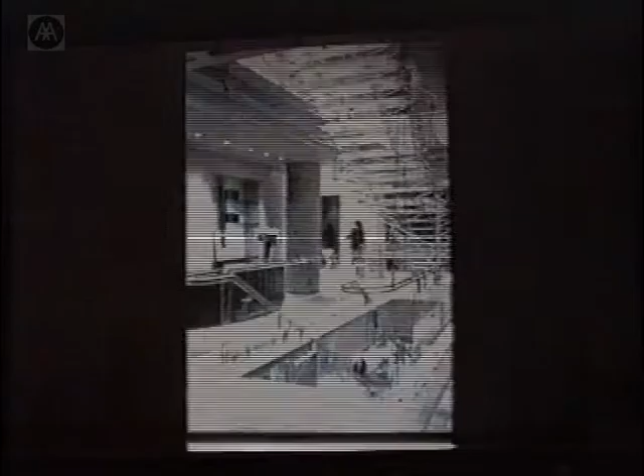This is Eva Jiricna's staircase in Sloane Street, now gone, and I believe rebuilt somewhere in Sweden or Denmark. This was quite a different solution, not engineered in the first place. A contractor in Los Angeles, while she was doing this staircase, used glass treads in aluminium trays, but they kept cracking. The contractor suggested putting acrylic between the aluminium tray and the glass to soften any hard edges. She finally thought, why have the aluminium tray at all? Why not just use the acrylic? It's quite a subtle result, because you couldn't use acrylic on its own—it scratches very badly and is terribly flexible, so it would need to be very thick as a material.

The glass is ordinary annealed glass, not toughened or laminated, just a sheet of ordinary annealed glass. The whole way this works is that if the glass cracks, the acrylic tread underneath simply holds the glass until you come along and replace it. This was installed in 1990, so it's been there about 8 years. I heard of only one cracked tread during that period, so it's quite interesting that it can be robust, serviceable, and obviously very elegant.

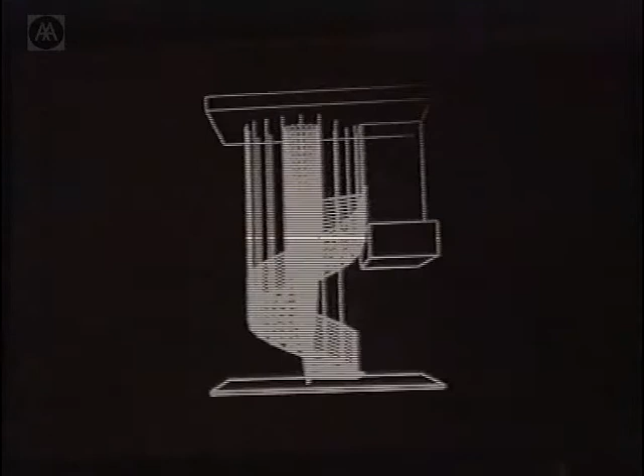This is a third method of forming staircase treads, the first project we did with Jamie. It's a very simple, very effective use of glass, and I think the most elegant part of this is the central core, which was made by a wonderful guy called Tim Eliassen and his company TriPyramid in Boston.

He actually knitted that basket together from, I think, 4 or 5 mil wire. Luke, who's here and worked on it, could confirm—4 mil wire? 3 mil even, right. They were welded together, came in 2 halves, and were welded together on site. It was quite an exercise.

But I'm talking principally about glass tonight, and this is the makeup of the tread. We didn't even really look at this in truth—Jamie just specified it. You can see it's 3 pieces of laminated glass, laminated with a very fine laminating material, with a sandblast on the top. That's the support condition underneath, with 2 little spars onto the basket.

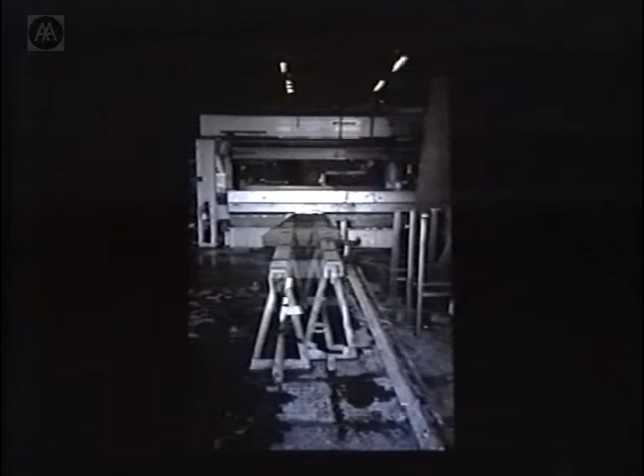So we had to make sure that didn't happen. We went through a lot of pain and torture. And the other thing about Japanese industry, particularly Asahi, is they were amazingly efficient and clean. They had white coats on in their factories, and they were all smiling. It was wonderful - they did everything in unison.

And of course, the odd thing was that they couldn't make these glass blades for this structure - funnily enough, because they didn't have a machine to toughen the blade, and they didn't know how to toughen it. Our man John from the East End, he had a machine that could toughen this blade, and he knew how to toughen it.

But the worry was that Asahi were fronting this job, and Asahi had to take ultimate responsibility. And I didn't want them to meet John - not that there's anything wrong with John. John is the best of the best, but he doesn't wear a white suit, and all his workers don't smile all the time. In fact, he works bloody hard, and he's got debris all around him because he's thinking about the thing in hand rather than what it looks like.

And it's not very big as a place - it's getting bigger now in the last couple of years, but at that point, we finally waited till this was made and lying on the table just like that, till we finally took the Asahi guys down there. And of course, when they looked at it...

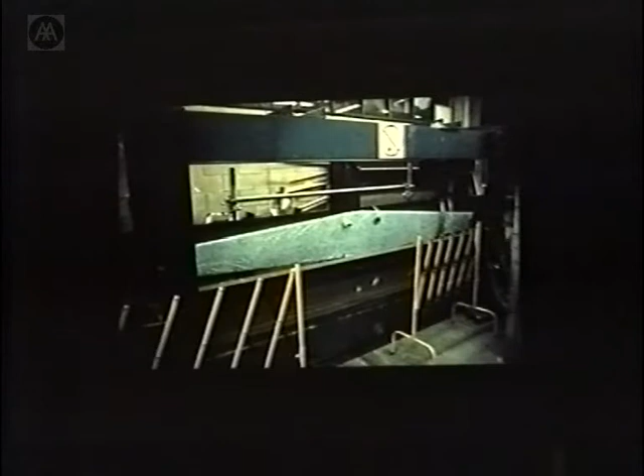So we took it, and they gave us a whack of money - £50,000 - and said go and do some testing. So we said, right, let's go do some testing.

So this is it in the laboratory at City University in London. The first go around, when they were cranking this thing up with a load on it, the bolt broke - much to the chagrin of the lab assistant, who in 72 years of his life had never seen such a thing. He was like a born-again person, you know, he got all these textbooks out. He said, 'Wow,' he thought this was a joke, breaking glass.

But the theoretical breaking load of this broke probably at about 9 or 10 tons, but theoretically, if you can get that hole right in the middle, it's about 19 tons. It's quite good, isn't it? It's quite heavy.

That's how it breaks - you can see it goes into lots of really small pieces because it's very highly stressed. That point, that's the boom - it's the failure there. It's wonderful when it goes. Everyone's nerves go, 'oh, bang.'

I can't stand it, to be quite honest. Every time I go to glass testing, I can't stand it.

Anyway, we went through these amazing hurdles to finally get it on site and built. And this is the jet. See what I mean? See how beautiful they're all exactly the same?

And the other funny thing was that having gone through all this testing and proved we had factors of safety of 12, there was someone from the contractor who was actually an architect, Suzuki-san. Suzuki-san, all the way through, never said a word. He was the only one who never smiled, you know.

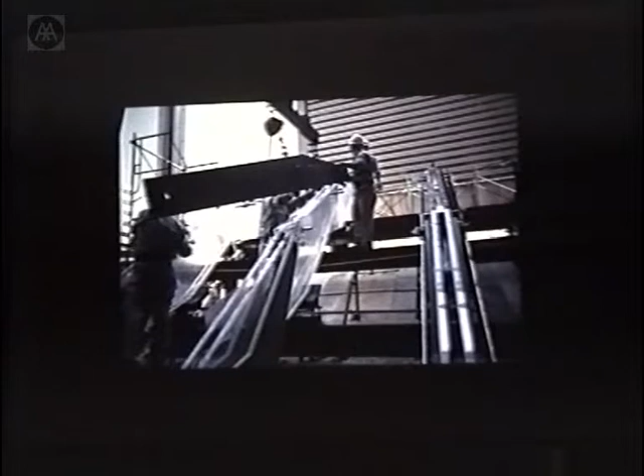There they are, in the core of the thing. They do absolutely nothing at all, right? They've got enormous tolerance here because their temperature movement is like that. And it would only be if the whole thing completely collapsed that they might at the end actually stop it touching the ground, because they deflect about 5 feet.

So they're in there like a talisman, and the only way we could get it built was to do that. And that's how it ended up, as a complete glass structure.

And we really had the time of our life. And we had the time of our life because we got hands-on at every level. And that was the real joy. And hands-on, being an engineer and not knowing where you're going, that was a real joy, because every day is a discovery.

Sometimes a shock. But inevitably, you see these acrylic things up there? They're all right, actually. I think they look fine proportionally, maybe it was an architectural sense. Maybe he architecturally didn't like it, and he wanted them a bit fatter. That was an excuse.

Funny reflections. And there's a little detail at the top that holds the roof panels on, just a little metal fitting in the middle. You see, you transfer the load from one to the other, so you get lots of purchase across that distance there. It keeps the load in the bolt down. That's why it looks like that.

Anyway, I better hurry up. This is the glass cube in Saudi Arabia that we just finished. Interesting thing about this is friction grip fins, which are laminated, not single sheets, which is normal, and in two directions, so the thing works as a two-way structure everywhere, and it's got lots of fail-safe in it.

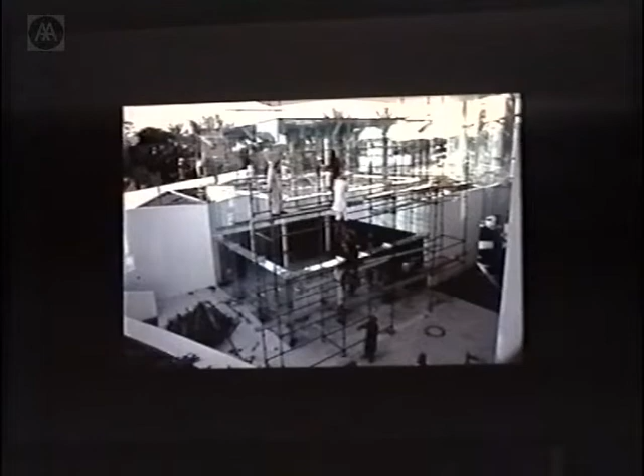It's nice, it's a local firm, and they built the cube. That's the other thing in the glass industry: often the big boys say, well, we're the only guys who can do it. But if you get hands-on and you really get down to it, you can do a lot. And that's it, put together. You can see the two-way plates there, and we've even got little diagonal plates in the corners there.

And it's even got doors in it, which is kind of nice. And we told our engineer not to come back till he'd walked on the roof. He did come back, he's back, that's him. Anyway, the idea is that they're laminated. If one breaks, you still have another one. Even if the whole beam went, the laminate material would keep it there because of the bolts on the laminate material, and the beam would span the other way. So it's all good. That was from the small.

This was supposed to be also the small to the conspicuous, in the sense that starting from a small idea, where does it eventually go? And we got through the Tokyo Canopy experience a chance to do this facade here, this bottom part here, which basically has horizontal beams spanning 11 meters between the column positions, which are there, and carrying the insulated glass panels in between. And these horizontal beams are actually external.

There you can see, that's during construction. And again, this was built by a local glass company. Pilkington and Asahi said it couldn't be done. And the glass company director took me out one night for lots and lots of drinks, as they do in Korea, at the end of which he said, if this doesn't work, and then he didn't finish the sentence, but I could imagine.

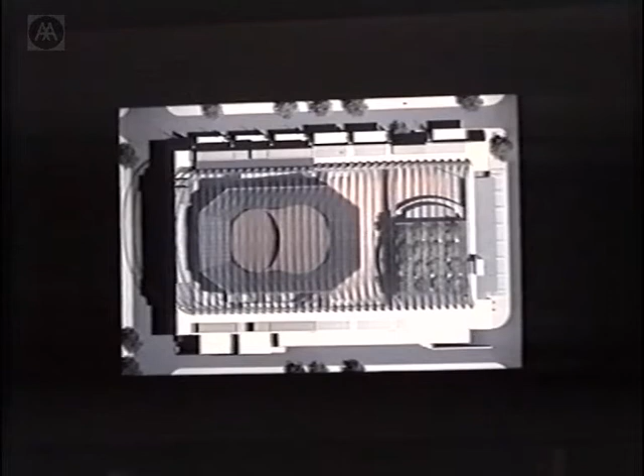There's the folds which give it its stiffness. Well, it's a barrel, obviously, because it's a big barrel. But just to go back a shot, the interesting aspect is also that it's a Vierendeel beam, and a Vierendeel beam just means that these elements, instead of being diagonals like you normally get in trusses, are vertical and are therefore in line with the glass, which can be normally cut as rectangular panels and put together, and it's fairly big. That's a big 2,500 seat concert hall.

And we're also doing the end wall in this in something that, when I was round Jamie's office one time, he showed me this model of something they were doing in Germany, and I said, "What's that?" And he said, "It's something we're doing with Jörg Schlaich." And it was a cable, which he undoubtedly will show you. Anyway, we kind of thought that was amazing to do such a thing.

So we've actually done something using those principles on the end wall here, where we've got cables at about 4-foot centres, but instead of having horizontal cables, what we're doing is weighting these cables in one direction only, and we've got cast iron weights on the bottom of the cables. We've got a whole row of cast iron weights along the bottom there, and when the wind blows, the wall moves quite a lot, but that's about 180 feet, which is about 60 metres or something across there. So the big weights are just in there, and they're just in one direction.

Our mock-up is in about a week's time, and we're going to get down and see what happens. But again, it's moving the Americans. The Americans don't normally do this kind of thing at this level contractually. They all get a bit worried about it. But we've got a local glass company doing this, National Glass. They're rather amazed at doing it, but they are. And anyway, that's my story so far.

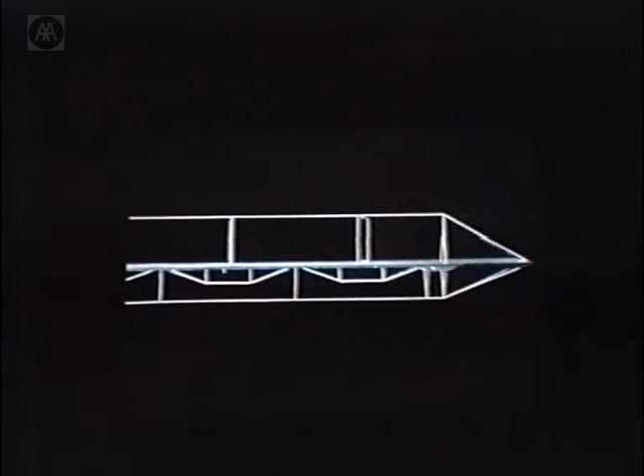And the glass planking was designed in such a way that, I'm not sure I can focus here, but the goal here was to not only use this glass platform as this very extraordinary glass form floating in space above the river, but to take sunlight and use the activation of light to let the light come down, strike the surface of the river, and then reflect back up.

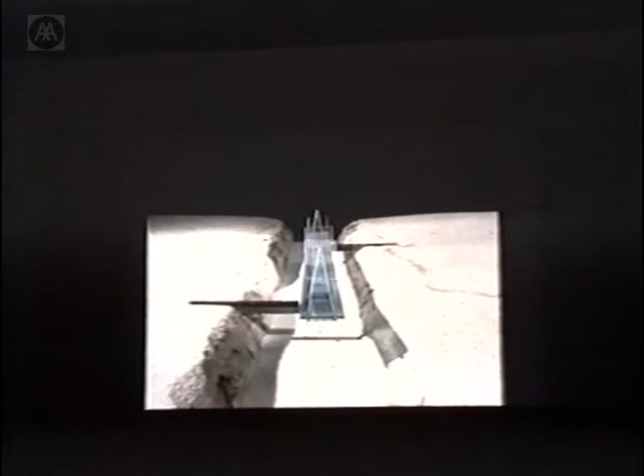So this glass platform basically is the surface of the river, sort of extracted upwards, and it becomes the surface upon which you pass over the river itself. And I think that just very simple notions of that, engaging our movement through a space, both in urban context, or in this case very much a rural context, but using these structures as a way to open up your sense of how you relate to your surroundings is a very, very critical element of all the work that we do in the studio.

And by taking one of these very simple principles, this is the same principle as on the bridge deck of post-tensioning glass, and this is a project done with Tony Broomhead, who's here. This is basically a wall. It's a glass wall done for a project by Richard Meier, and this wall basically separates a private art collection from a private residence.

And it's designed with a counterweighted system so that the glass wall basically descends down into the basement of the building, and then when they want to separate these two spaces, the wall is deployed and comes up into the space. And it was a study really of two things.

One being, how does one basically take a stack of glass, and I'm talking literally of a stack of glass, stacking glass plates edge to edge, two stacks with a stainless steel rod running down the middle, and putting enough compressive load on those glass plates that that's all the structure you need. You're putting so much tension into the system that the glass basically has no other restraint except for the compressive load.

And simultaneously, by taking these two surfaces, playing with the phenomenology of both surfaces, the one wall facing the collection area has a very highly reflective surface to it. It's still transparent, but it's a heightened level of reflectivity, slightly higher than a clear piece of glass. And then the reverse surface is totally diffuse.

And to do projects like this, and this is, I think, where Tim's speaking in advance of my own speaking is very appropriate, because I think we follow very similar avenues here from the point of view of wanting to work with a material that none of us really understand in all of its potential strengths and weaknesses, and therefore all of these projects demand empirical testing before you can move forward with them.

And in this case, you're seeing the two stacks of glass, one series at the front, one series at the back, stainless steel rod running through the middle, and putting a significant load into these pieces of glass and then trying to break them. We couldn't break it utilizing any of the normal testing procedures, which is swinging 300-pound weights into the glass itself.

And then we needed to essentially just break the glass, which we did with a sledgehammer, to find out what would happen, because you would imagine by stacking these glass pieces edge to edge, putting such a serious load on them, if you were to lose one panel, that the whole system would be a progressive failure.

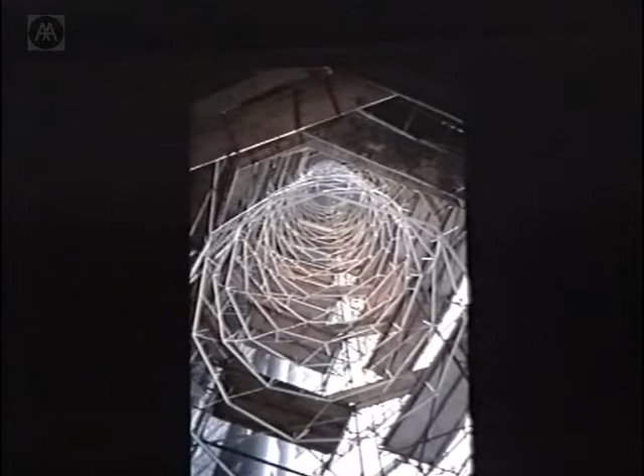So it's this exploration of, as I said at the very beginning, in this case, focusing on a very, very specific task of compressive loading of glass. How can this be developed? How can this then lead to larger projects? And using these small-scale projects as explorations in that sense, but simultaneously overlaying them with this goal of playing with reflectivity.

And then taking this to another level, using glass as a compressive material, and this again was with Tony, who's here, is this project, which is in Hong Kong, and this is one of the projects next door here in the gallery. And what we tried to do in the gallery exhibition was not necessarily just show drawings, but try to have you participate in some of the installation sequences by using those photographs and slides. And we actually do the installation work. We actually oversee fabrication, and we do the installation work.

And I think it's critical to understanding what happens with these structures when they're being built, to then be able to take them to the next level afterwards, to be there and to really understand what's going on with them. But what you're seeing here is this pair of helical nets woven that create the tensile net that will ultimately hold all the glass pieces in position, sort of the scaffolding that goes up around this piece.

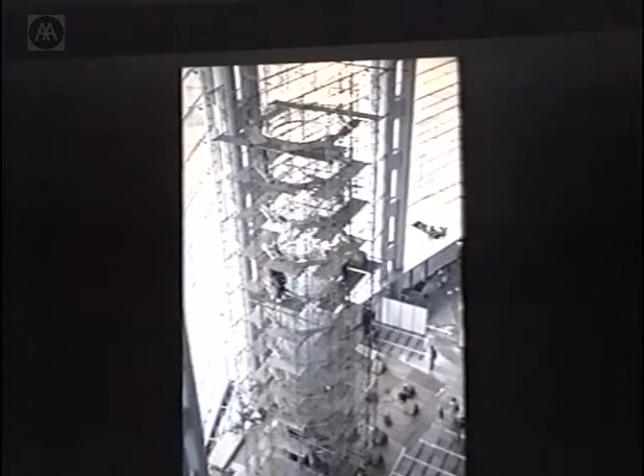The nets are hung from this ring. There's one helical series of nets in one direction, then an opposing helical net in the opposite direction. They're all woven together and then preloaded at the bottom. A very, very significant amount of weight added to the bottom through water basically stretches those cable nets. Then all the glass is put into the woven cable nets. And here it is all coming up, the last pieces of glass going in.

These are the cables. They're about 3 millimeter diameter cables. The last pieces of glass go in, and as you're progressively building the piece, you're slightly removing preload, so the whole piece goes into compression once all that preload is removed.

And a comment that Tim had made, I think, is very critical to doing structures like this, and that's the ability of the machinery today in the glass industry to actually manufacture parts with essentially zero tolerance. In this case, this is about a 25-meter high structure. Tony had completely calculated out all of the different conditions of this piece under its preloading, and then its loading with the glass. And you're able to build something like this over that length to 1 millimeter in dimensional tolerance. And part of that's due to the fact that the glass is being cut with these water jets and other equipment that allows for that to take place.

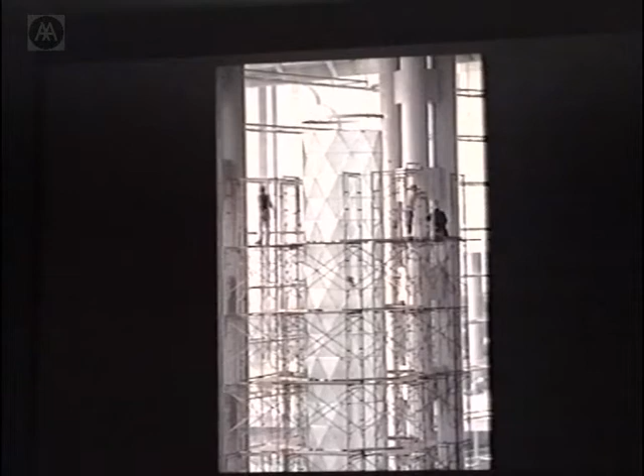So anyway, here it is. It's just working with a shell. It's basically a glass shell structure. And the obvious next step is you can build a complete structure. It doesn't have to be a piece of sculpture. It can actually become a room, a building, whatever it might be. But you can actually use the glass bearing on its adjacent panel of glass in compression to build much, much larger structures.

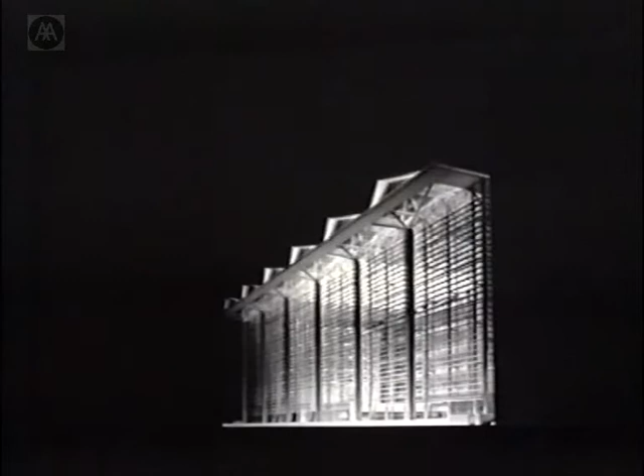Other projects, I mean, the project that is shown next door is this one, which is in the Phoenix courthouse, and is done with Richard Meier again. And it's an interesting project in the courtroom. This is a very, very large public atrium space. This is an immense volume here in Phoenix, Arizona. Obviously, very, very extreme climate. It's all naturally ventilated, using misting systems to provide cooling in the summer, and then just natural ventilation in winter.

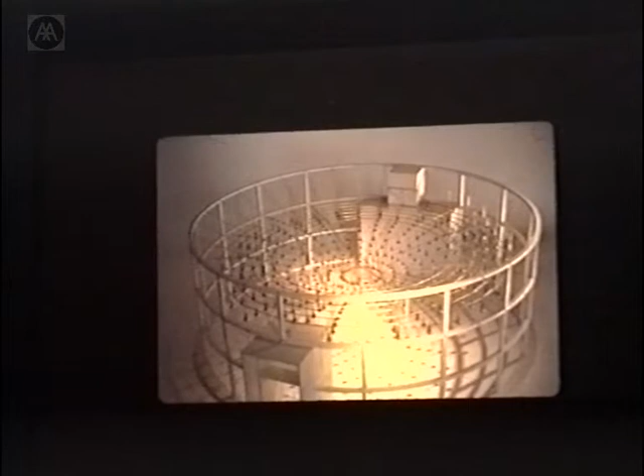And in this drum, which is this courtroom, which will be used for major cases and naturalization processing, we were asked to then design the ceiling or roof for that courtroom, and here's the building under construction. That drum is inside, and the drum measures a little over 100 feet in diameter, and again, it's a cable structure, and this is shown in the other room, and this is a working model of this drum.

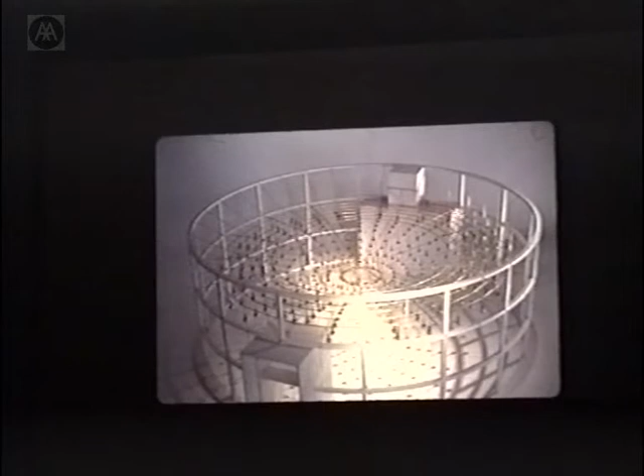And what we've tried to do here is there's two different components to the glass. The outer circumference, sort of this flat roof circumferential area on the side, is totally clear glass. So standing in this floor area of this courtroom, you can look up through this outer circumferential area and look up to the sky above. And then the inner section here is actually a concaved spherical section, and it's made out of a diffuse glass. So it's essentially a fragment of a sphere floating in this clear ring, almost as if it's a bubble floating on the surface of the water.

And that lens really is truly used as a lens. All of the lighting for the courtroom is at the very top of the drum, which is significantly higher than this model. And the lighting is directed down to this lens. That glass refracts the light, and then the light is reprojected down to the different judges' chambers and the jury benches and all of that below it.

But what is interesting about this structurally, I think, is not only its cable net system, and this is a model that is used to anticipate the loading of this type of a structure. When you build the cable net and then begin adding weight to it, the weight being the glass, the whole distortion and the ability to sort of predict how the thing will behave during installation is critical. So this model was really designed to try to get an understanding of how it would behave when you begin to load it.

But what was of interest in this, in terms of the structure, is that we've actually taken the fire life safety system, which is the sprinkler system for the space, and we're actually manufacturing the stainless steel sprinkler systems, and they're being put into tension. The whole fire safety system is put into tension and is used as part of the structure of the whole ceiling of the building itself. And it's only in these cases where if you were to take on a project and build it, you could really do something like that.

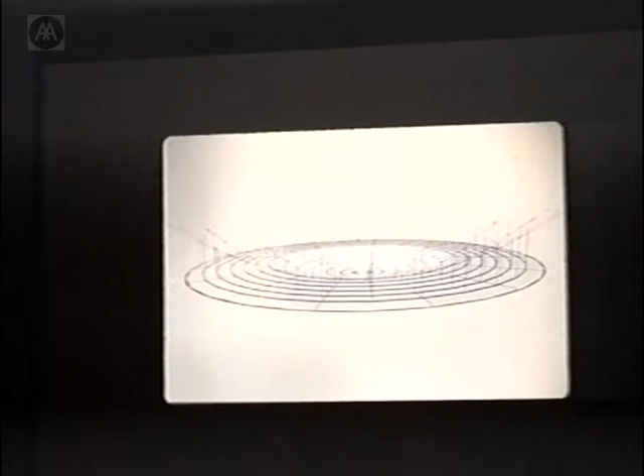And these are computer views of that lens. This is just starting construction in about the next 3 weeks. These are the sprinkler systems around it, and that disc, the clear perimeter section, and then the central lens piece beyond it, and sort of what you would see from the interior.

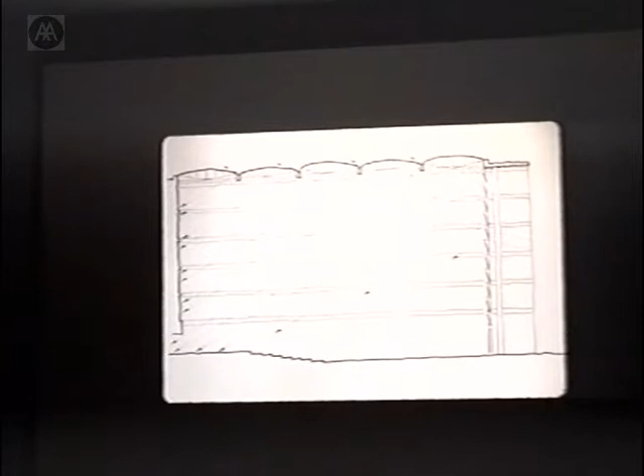But I wanted to just talk about the use of light. I haven't really spoken about that in any serious way yet, but something that intrigues us in the studio is the fact that glass hasn't really been explored very much, I think, really due to the fact that its presence is often denied. Typically we deny the presence of glass as a material in a building. It's thought of in a very abstract way as a boundary condition between interior and exterior, but it's never really represented as something in and of itself, and only in few instances, in some of Mies's work, where the simplicity of the structure and the surface reflectivity of the clear material is integrated into the concept, is it really explored in a much more complex way.

And something that I think Tim is working with, and something that we certainly work with, is when you basically release the glass from a framing system. I mean, we often think of glass as having to be confined in some sort of a frame or subframe, but immediately when the material is sort of taken out of that frame, you're made aware of how light interacts or projects through it, and its own transparency, much like, you know, water or air, and light's interaction with it becomes much more apparent, and you're able to explore its properties to a much more heightened level.

And in some of these projects where we're focusing just on light, and some of these latter projects I'm going to show you really deal mostly with light and structure, but I'm going to speak mostly about light, is a project like this, just recently finished before Christmas in Berlin for the German Foreign Ministry office, and it's a roof, a roofing system, and a curtain wall done with the engineers Schlaich Bergermann from Stuttgart. And it is a cable system, as Tim had mentioned. It's a two-way cable net, vertical cables and horizontal cables, highly tensioned, that support the curtain wall, and very simple cable trusses, lenticular cable trusses for the roof itself.

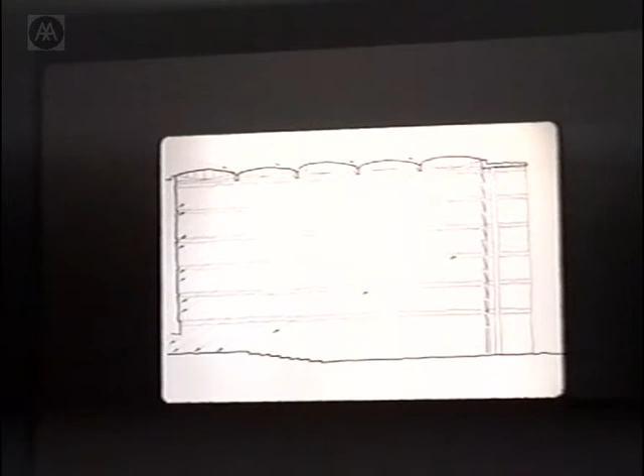But the whole principle of the wall is that this wall faces north. That direction is north. The sunlight, very much like London, obviously very high latitude, very low levels of light coming through the roof. The wall is basically designed to get maximum transparency at the roof level, use the structure and the roof supporting the beams to take that light, bounce light back into the space itself, and then in addition to that, to use this transparent front surface wall as a reflector. Very similar to the screen done for the Richard Meier project. It has a transparent coating on it, about a 30% transparent reflectivity to it. So light that passes through the roof hits that surface and also bounces back into the building itself, as well as passing through it out into the street.